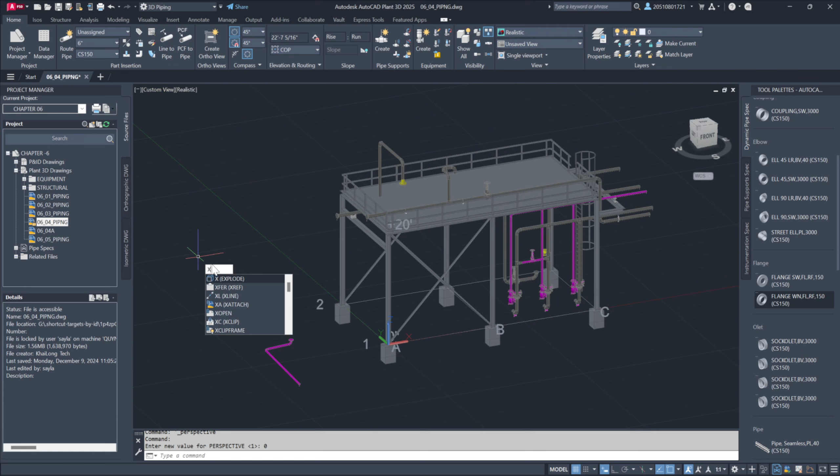To demonstrate, consider opening the piping model titled 06_04_piping. In this model, the equipment has been removed and will now be reintroduced as an external reference, XREF. Switching to a parallel view and using standard AutoCAD, locate the file through the appropriate directory and insert it as an overlay at a specified insertion point, 0,0.

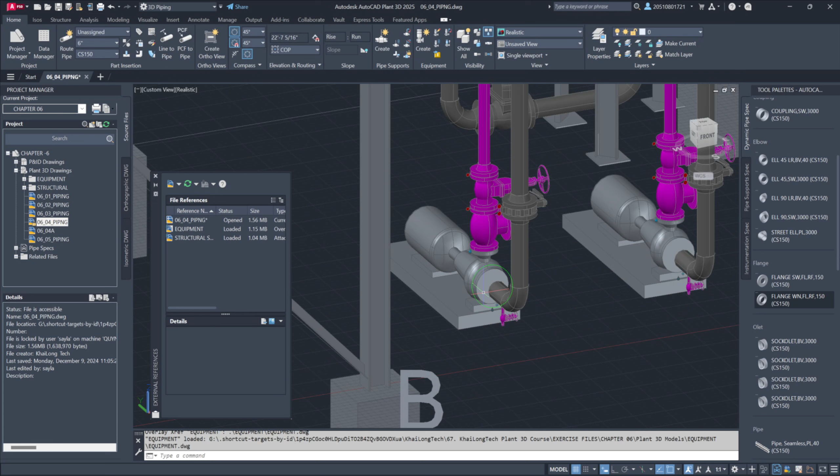Upon inspecting the connections, you may notice unconnected components indicated by a teardrop symbol. To fix this, right-click the flange, choose Connect Component to Adjacent, and select the appropriate nozzle. Bolts and gaskets will appear, confirming a successful connection. Repeat this process for all necessary components within the XREF.

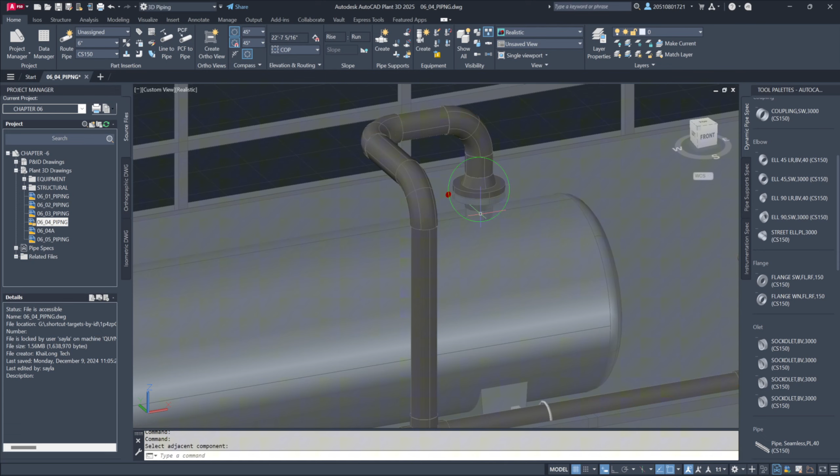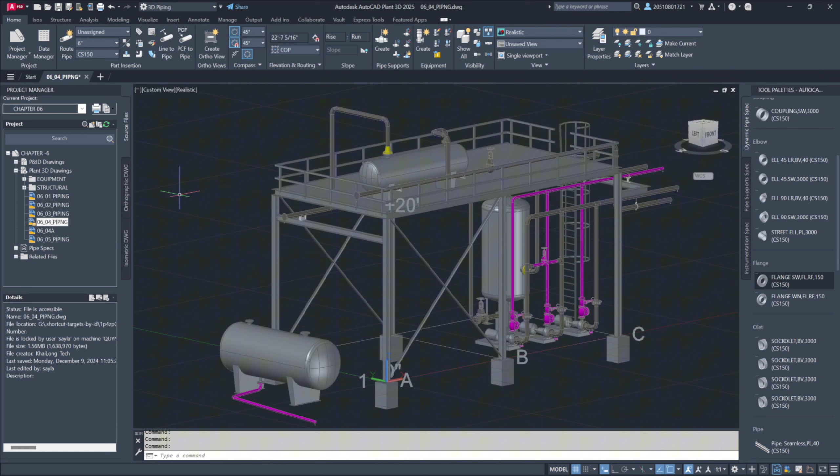Next, bring in an additional XREF for piping, such as 06_04A. Again, insert it as an overlay. If this XREF represents a modular or area break, the piping should still connect seamlessly.

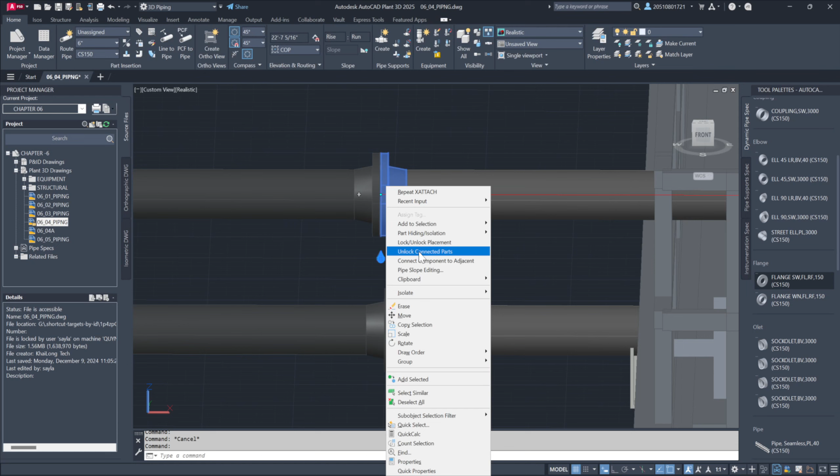Similar to equipment connections, right-click the appropriate flange, select Connect Component to Adjacent, and ensure the necessary gaskets and bolts are placed. When running new pipe sections, a different approach is needed. If no visible connection point exists, check the pipe size and pressure class. Then manually initiate a connection using the command PLANTPIPEADD.

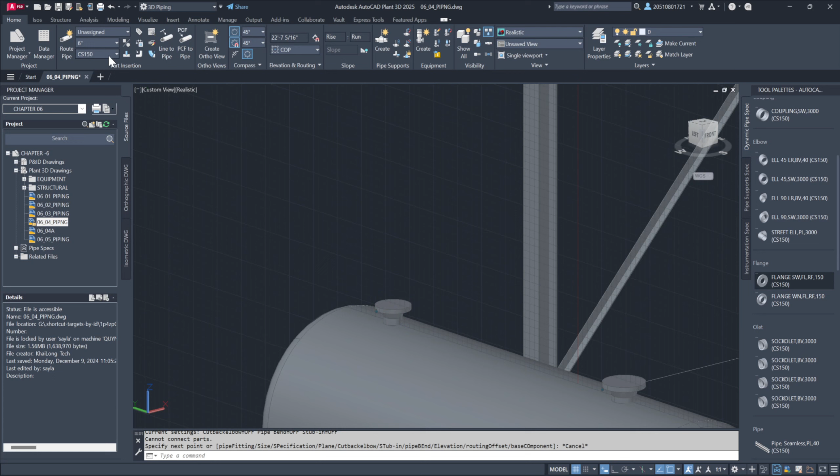This command establishes a link between the XREF and the primary drawing, allowing you to extend piping from the correct node on the equipment. With all connections in place, you can verify the presence of bolts and gaskets. Remember the command PLANTPIPEADD for future use, as it ensures piping can connect across XREFs without disrupting collaboration. This method enables multiple designers to work in the same area while maintaining proper connections and accurate isometric outputs.